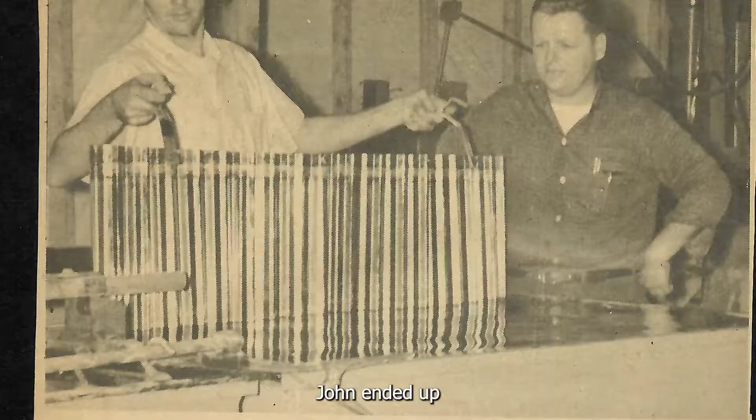John ended up a great employee and a wonderful asset. Neil was John's brother. He did kind of the artistic stuff, a lot of pattern work and tooling and stuff like that.

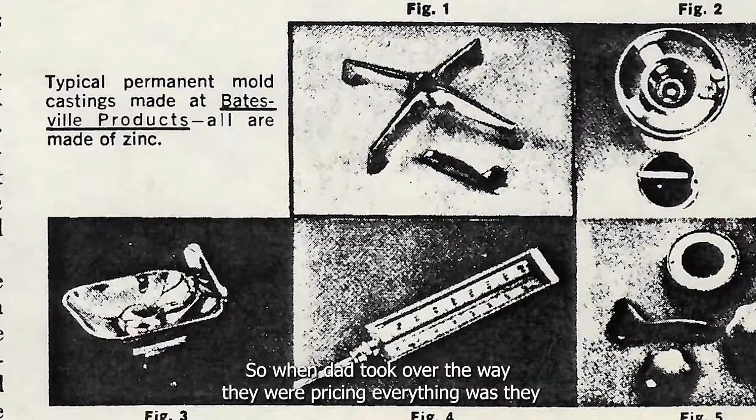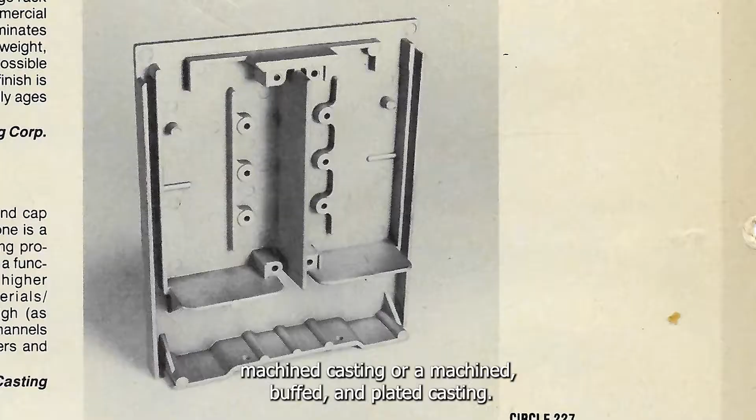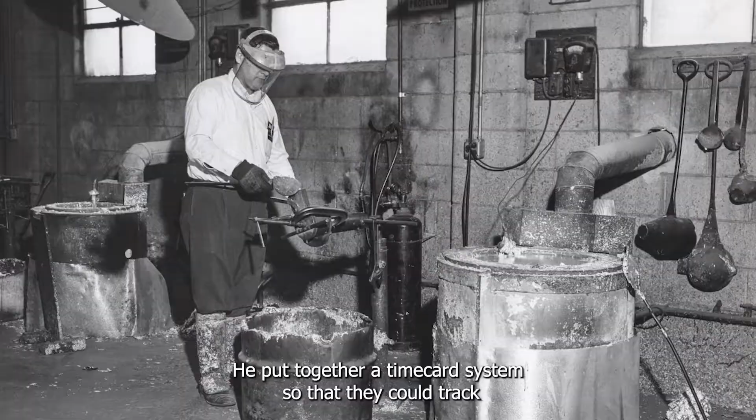When Dad took over, the way they were pricing everything was they sold it all on a per pound basis, whether it was a raw casting, a machined casting, or machined, buffed, and plated. Prices were calculated based on weight only. Dad took one look at that and said, this is crazy. He basically instituted some standard business practices, and put together a time card system so they could track product going through the factory.

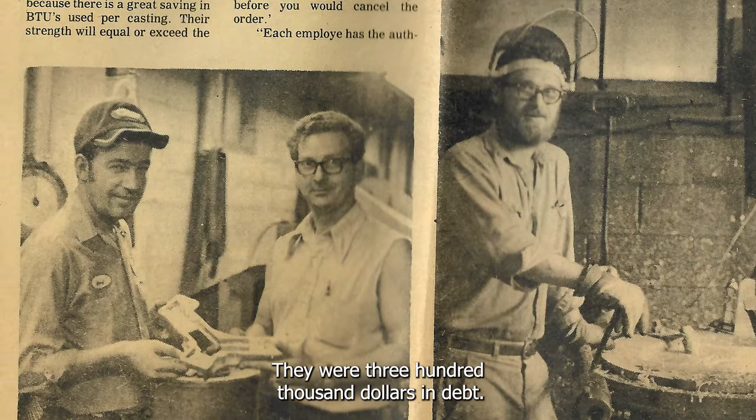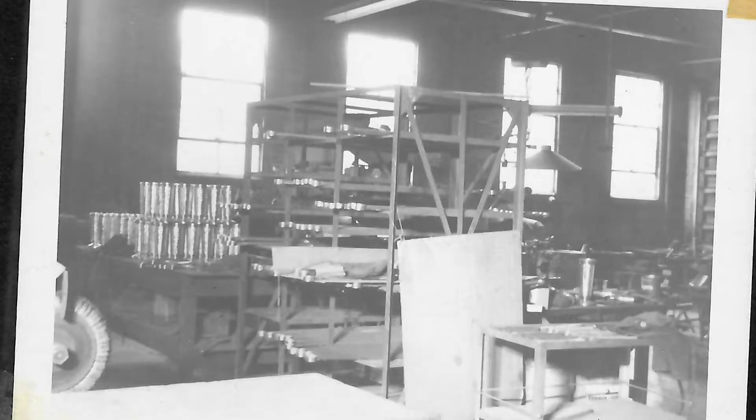When Dad took over, they were doing about $150,000 to $200,000 a year in sales. They were $300,000 in debt. At the time Dad bought this, the only building was the cinder block building on Margaret Street, and then a smaller building on the back, kind of a lean-to, where the buffing was done. They had a very small plating department and the foundry, and that was the entire thing. I think there were like 12 to 15 employees.

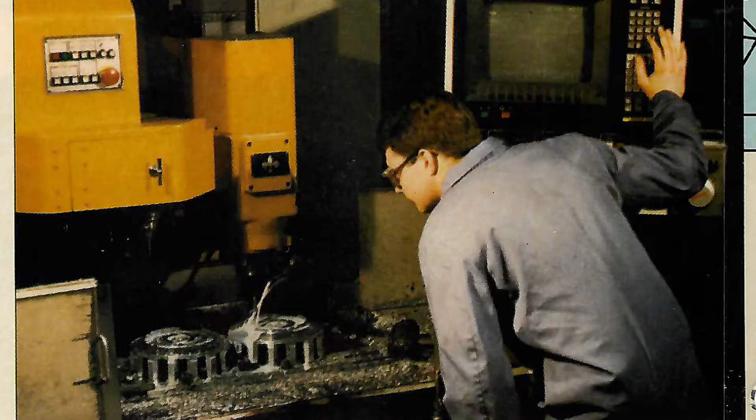Well, they did some machining from the very beginning, but mostly just drill press kind of stuff, drill press and tapping. The first CNC machine probably wasn't until the early 80s.

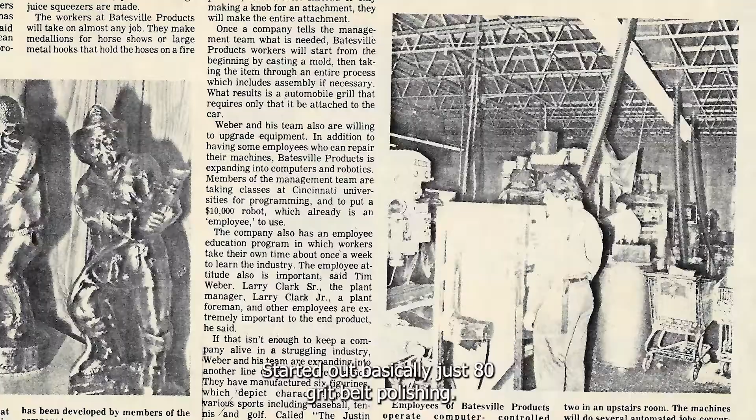Right after I turned 16, I came down and went to work there in August. Started out basically just 80 grit belt polishing Kenneth Kramer chair bases, which weighed 15 pounds. So if you do that all summer, you can do one-arm push-ups for the next year.

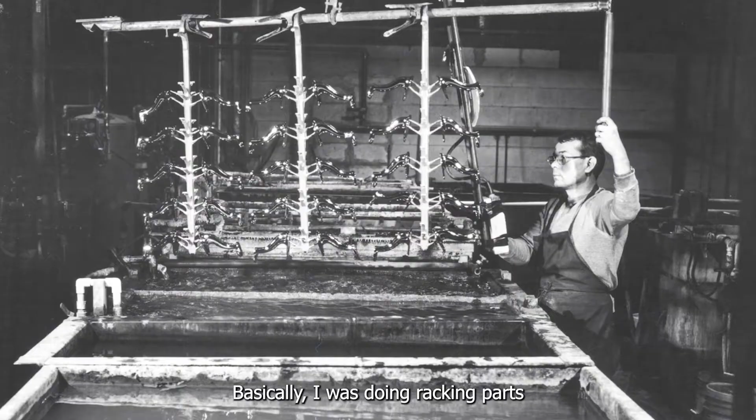So I started out doing that, and then I worked in the plating department as an assistant, basically racking parts and moving them through the plating department. I learned how to do testing on the tanks for nickel metal content, copper content, balancing the pH, adding brighteners, changing out all the cleaners and stuff like that.

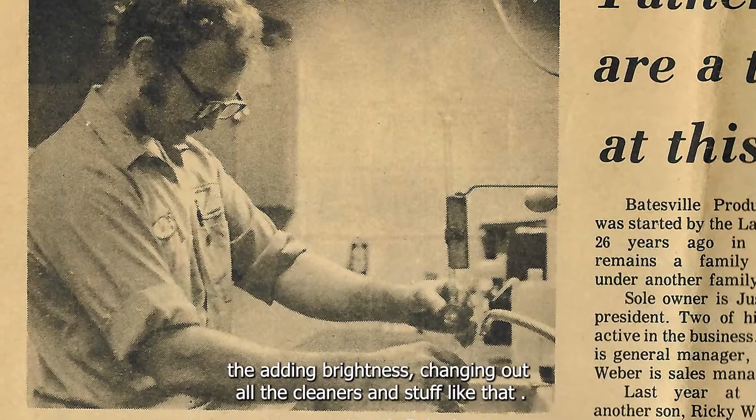There was no hoist or anything, everything was done by hand. You literally were leaning over cyanide and chromic acid tanks, putting these racks into that solution. But I got to learn quite a bit about plating, which served me well for most of the rest of my career.

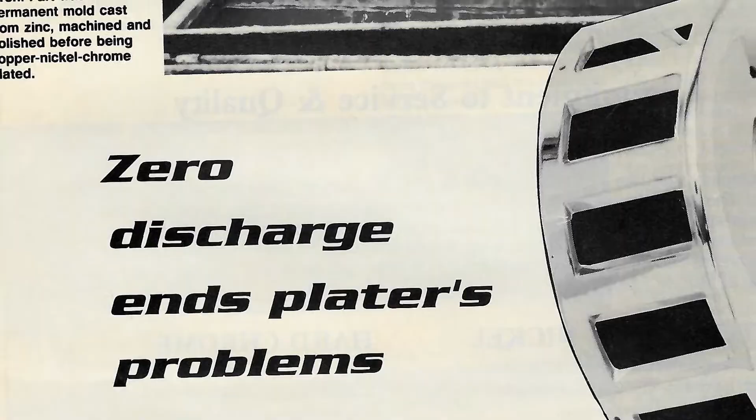After I graduated from Marion, so that would have been '74, '75, something like that, I came back as a sales manager. I got an account up in Indiana at FMC Corporation.

Then I found out there were all these fire truck companies all over the place buying very expensive, very crappy looking sand cast brass parts, and we could make the thing in zinc for about 30% less, and do all the plating in-house. In less than a year, I had brought on maybe 8 fire truck companies, and that's when the business really started to grow.

The first big expansion was to the back of where the buffing room was. That probably would have been in the mid-70s, and then they added on a third building onto the back of that, and eventually a fourth building.

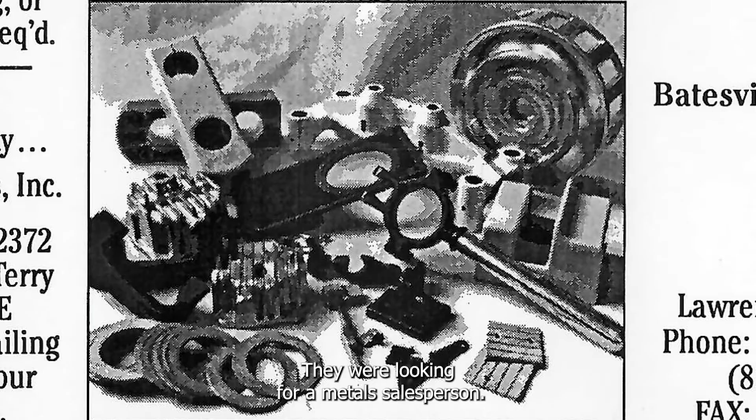There was an ad in the Sunday Enquirer from Ball Corporation. They were looking for a metals salesperson, and I think that would have been around '78 or '79. I went down for a job interview, and then had to go tell Dad that I was going to take that job.

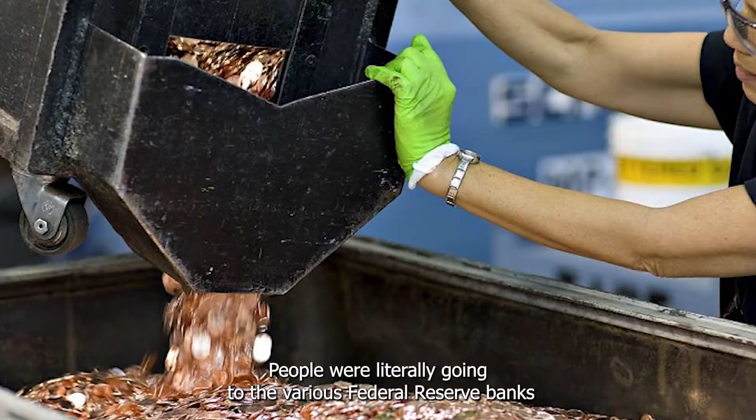But when I went to work for Ball, ironically, in 1981 or '82, the U.S. Mint came knocking on the door. At that time, the penny was solid copper, $1.20 worth of copper in every dollar's worth of pennies. In New Jersey, people were literally going to the Federal Reserve banks and buying up truckloads of pennies and scrapping them for the copper value. So the mint had to do something.

So I had 5 pounds of penny blanks and brought them down to the shop at Batesville, and we had a little miniature barrel plating thing. I plated 2 or 3 pounds of these things, packed them up, shipped them down to my boss. He got them into work at 8 o'clock in the morning, and at 8:10 the president of the division was calling me up saying, 'What did you do?'

And so in 1999, in the run up to 2000, we were shipping from Ball Corporation 42 tractor trailer loads of penny blanks every week. I think we did 22 billion penny blanks that year.

I've literally traveled all over the world. I've had such a fantastic career and such a wonderful life. And actually, I would not have been able to do any of that but for my early experience with Batesville, with electroplating and zinc. Think about all the family members that have wandered through there at various times.

It seems like everybody did a turn at the wheel down there. That's a good underlying story to this general success of the business. I don't think Dad would ever have believed, when he bought it, that it would turn into what it is today.